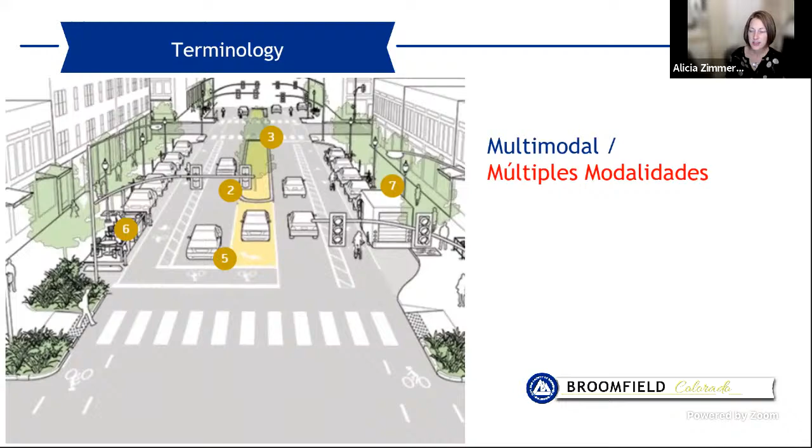Multimodal just means multiple modes of travel or transportation. And a mode of transportation is what method you use to move yourself. Usually we think of the ones traveling in a vehicle, traveling by transit, bus, something like that. Walking, wheeling on the sidewalk, wheelchairs, and some other wheeled vehicles or people using wheels. And then those on bicycle, and that could be different locations depending on particular use, comfort level, and facilities available. So that's what multimodal means in the perspective that we're looking at tonight.

When we look behind, what we say behind the back of curb, so between the curb and the buildings or the park or whatever, sidewalk, most people are familiar with that term, but the sidewalk that I've shown in yellow here is what we would call a detached sidewalk, which means it's separated from that curb. And an attached sidewalk would be in this orange area shown right here. Again, attached to the curb. Those have different comfort levels and we have different conditions throughout the corridor. So we'll talk through those as we go through this as well.

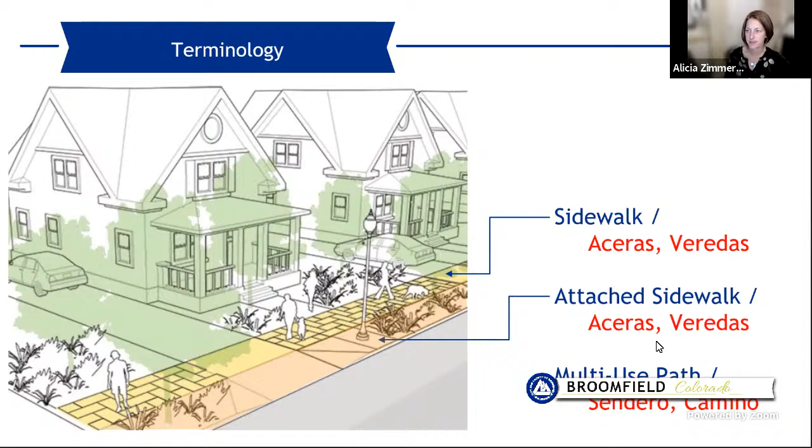And I've also shown the word multi-use path here. And the reason that's not called out specifically is because multi-use paths look a lot different depending on where they are. Generally, they are wider than a typical sidewalk because they're designed with the intent to accommodate bicycles, people on bicycles, people walking, people in wheelchairs, people with strollers. And so they're usually wider and quite often detached from the curb. So we'll see some examples of those. And you all have examples of those on the corridor already.

So what we call a bike facility is any treatment on or off the road that accommodates a bicycle. And bicycle facilities range from including a dedicated space on the road for somebody riding a bicycle, or a shared use path for somebody riding a bicycle, all the way to a sharrow within the travel lane. And that's still technically considered a bicycle facility. We'll talk through those later as well.

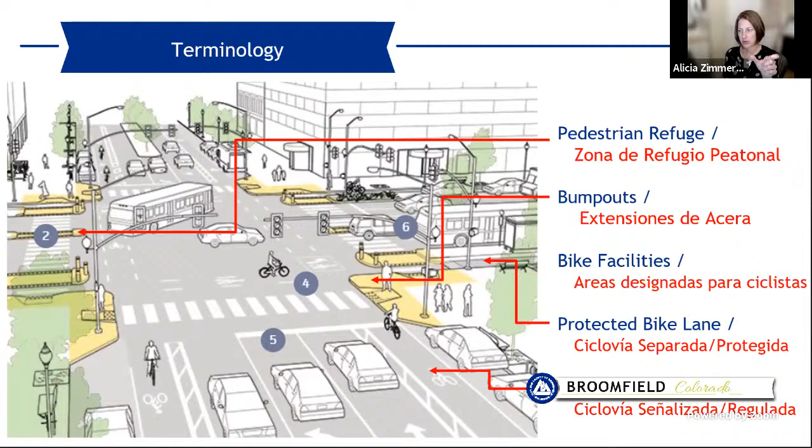So two types of bicycle facility that some folks are less familiar with: protected bike lanes. In this graphic, this protected bike lane is separated by a curb and median, separated from vehicular traffic by a vertical element, curb, post, something. The difference with a buffered bike lane is it is horizontally separated, not vertically. And so with a horizontal separation, we consider it a buffered bike lane.

So with that, I'm going to turn it over to Marc to talk about the project background. All right, thank you, Alicia. My name is Marc Ambrosi. I'm a senior transportation planner with the City and County of Broomfield. And I am project manager on the Broomfield side for this project that we're talking about tonight. Next slide, please.

The first one is multimodal transportation. So this plan tells staff that we are planning for all modes of transportation. This includes pedestrians, bicyclists, automobiles, buses, not just people in their personal automobile. The second thing that I want to point out is that we are planning for people of all ages and abilities. So this plan established policies to ensure that we are providing a safe, functional transportation system for all users, whether that's children, older adults, people with disabilities, and everybody else in the community.

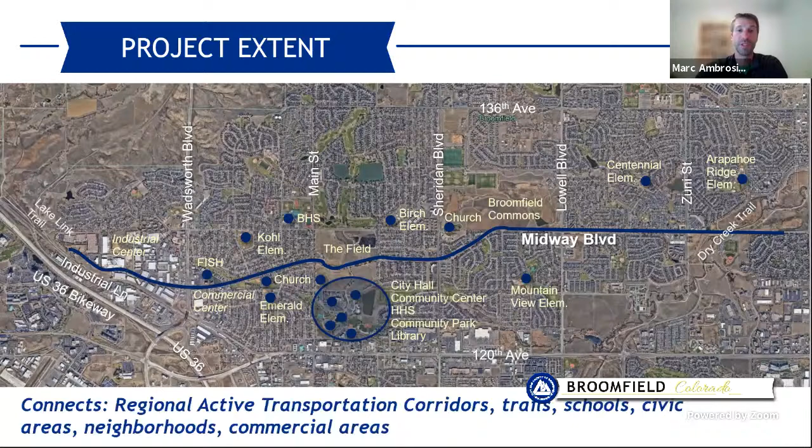So in this project, we are looking at all of Midway Boulevard, and this extends from the Lake Link Trail on the west, where there's a little cul-de-sac, all the way out east, actually into Westminster by the Dry Creek Trail. And in this graphic, I just want to point out that there are a number of facilities that are either on or close to the corridor. This includes things like schools, municipal buildings like City Hall, DMV, the library, open space throughout the corridor, places of worship, and community facilities like Fish and Health and Human Services. Next slide, please.

So why are we meeting tonight? We're here because we need your input. We need the public's input to make sure that this corridor is safer and more equitable for everybody using it. And your voice is really essential for the development of this corridor. We want to make sure that whatever comes out of this study, the recommendations, work for the people who live here. Next slide, please.

Through the spring and just wrapping up now, we've been doing data collection and analysis. We also kicked off the public engagement on the Broomfield Voice page, where people have opportunities to comment on a map. We've also been out at a few events in the community where we had other opportunities for public engagement.

The next phase, shortly after we hold this round of public meetings, we'll be moving into alternative development and concept design. And so what we're going to do here is work with the consultant team to identify probably 2 or 3 different potential strategies for different locations on the corridor. These would be improvements. They may be things like operational changes. So, changing the striping a little bit, changing the signal timing. And we're going to put together a package with a couple of different alternatives.

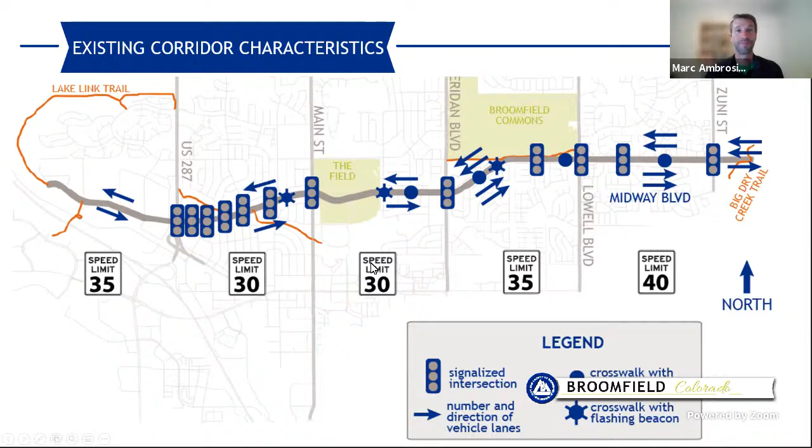There's a pretty wide range of traffic volumes that we'll see. Starting on the very western side, west of US 287, we have the lowest traffic volumes. That kind of makes sense. Over there, the land uses are more industrial. There's not the residential, and the road kind of terminates at the end.

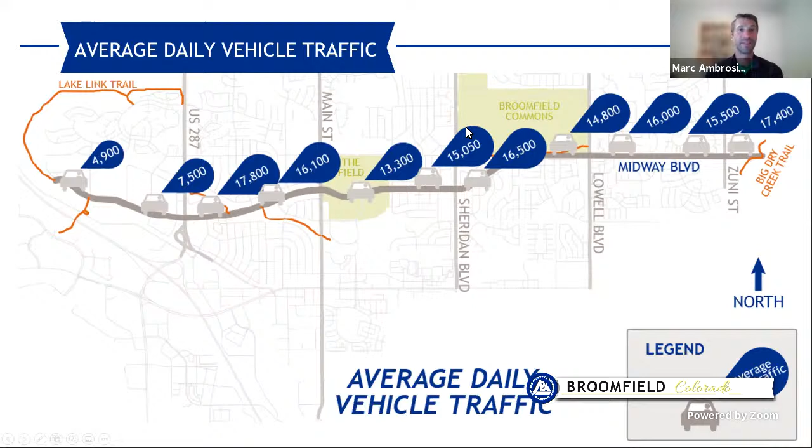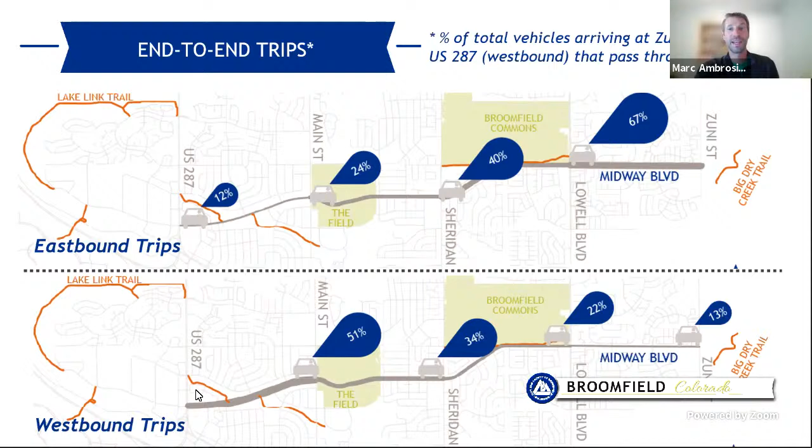Now we see something very similar on the westbound trips on the bottom half here, where again, about 90% of vehicles aren't continuing all the way to US 287. So what does that mean? And we're going to jump to the next slide here.

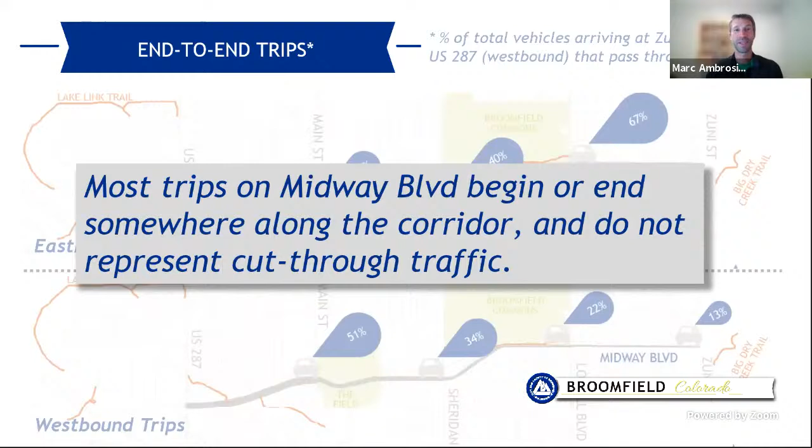So this is important. Most of these trips on Midway are not cut-through traffic. It is not regional traffic coming from Thornton or somewhere else using Midway as a cut-through so they don't have to take 120th or 136th. This is people who live on or near the corridor, using the corridor to get somewhere on or near the corridor. So when we're talking about traffic volumes and speeding, that's really the people who live in this area. So that's just something to keep in mind. Next slide, please.

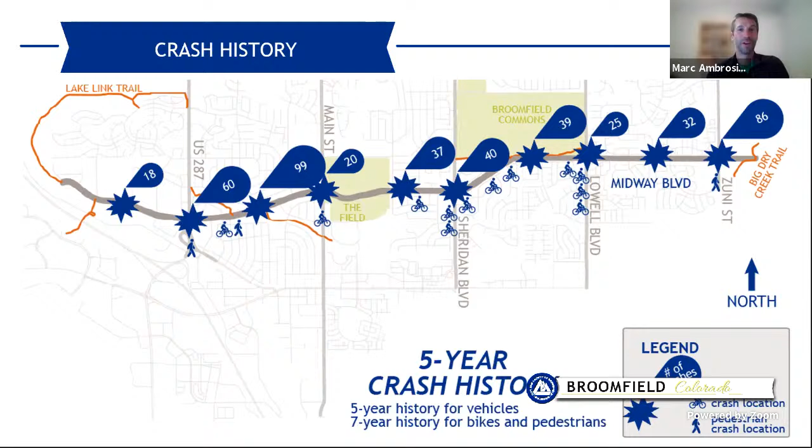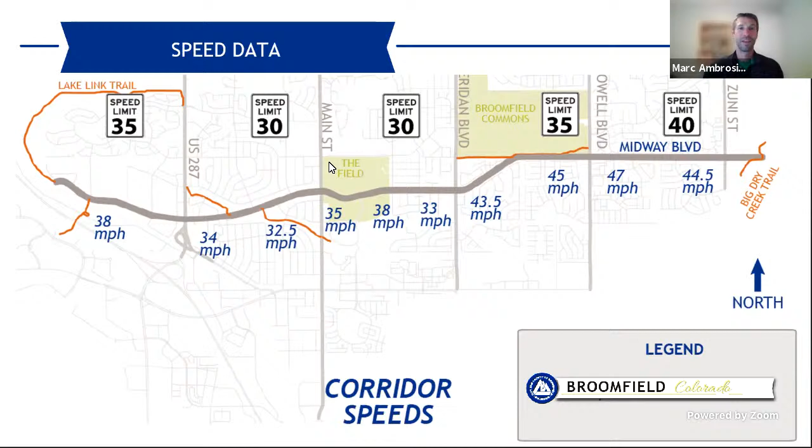All right, next slide, please. Oh, all right. Well, I'll be turning it back over to Alicia to take us away on the rest of our existing conditions information.

Thanks, Marc. So I think there's the question of, okay, now we have this existing conditions information, and that, I should note, is not all we have. It's just kind of an overview of some of the ones we thought people may be interested in. So we have this data, and what does it mean for concept and alternative development on Midway? And I'm going to focus on maybe one example of what we do with that type of data.

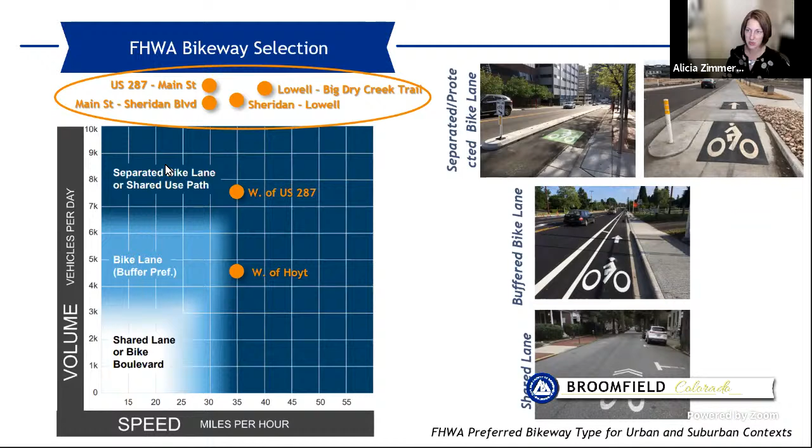And I've given some examples over here on the right of what these types of bike lanes are. We'll talk more about the benefits, but just to keep a picture in your mind, this shared lane here is this white box, and it's a sharrow or a shared lane marking. You actually have one of these on Midway in this section. Let's see, right here. That's where you currently have a sharrow. And then buffered bike lane, we talked about what it is with that horizontal space, and then 2 examples of separated or protected bike lanes, which would be the navy blue. So that's one of the types of things that we do with that data.

4% of people are highly confident bicyclists. 12% of people are somewhat confident, and 59% are what we call interested but concerned. That means they want to bicycle, but they might be concerned about some reasons for not bicycling. And then there are 25% of the population that we say, no way, no how. They're not interested in being on a bicycle. And so we've shown them as pedestrians because everybody is a pedestrian at some point in their trip.

2 things are important about this information: 16% of people is all the people that are regularly comfortable biking today. But if we look at people who want to bicycle, who are interested but concerned, 60% of our population would ride a bicycle if it were safer and more convenient. So that's one of the reasons you'll hear me focus on the interested but concerned population when we're talking about bicycle facilities. We want to make sure that Broomfield is providing mode choice. And right now, in some of the transportation modes, there isn't much of a choice for particular sections of these roadways.

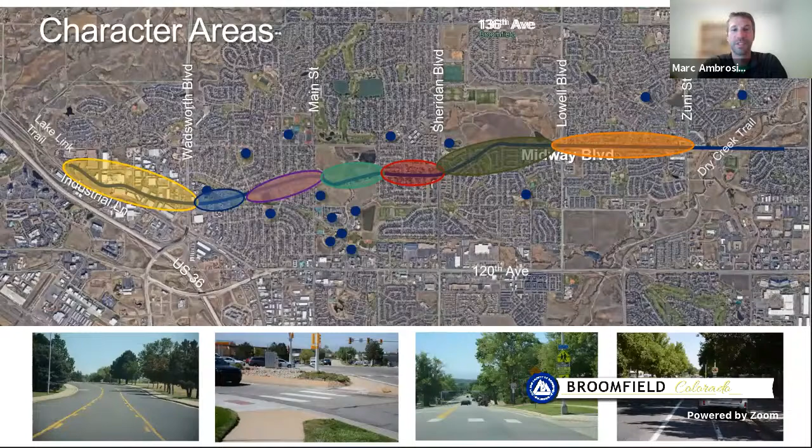And so we just had a nice discussion about that very western section, west of US 287. It's very industrial. You see some trucks. And so we've categorized that as its own thing. We do similar things throughout the corridor, and the images below kind of give an idea of those different character areas throughout the corridor. We're not capturing everything, obviously, but these are just an example of some of the differences you'll feel when you're on Midway Boulevard.

Next slide, please. So I'm going to jump right into talking about that section between Lake Link Trailhead and US 287. We have this great image here showing one of those large tractor trailers. You'll notice there's no bike lanes. There are narrow attached sidewalks in this section. There's a whole lot of pavement between the two curbs. And so this is an area that we think at minimum we can do some restriping and reshape this section of the corridor to make it a little more accommodating for bicyclists and pedestrians.

One of the things about this section of the corridor is the land uses adjacent to it are a little bit more industrial. And so this is not, today, particularly the area you're going to want to go out after dinner on a walk, but we hope to turn it into something that feels a little bit more comfortable for everybody out there. Next slide, please.

So US 287 to Main Street, the way we have broken this up is actually into two sections. This section of roadway overall has the highest traffic volume of the entire corridor and has significant crashes. This area is categorized by kind of a mix of travel lanes. So primarily you have one through lane, but you have all kinds of turn lanes going off in different directions, and there's limited space between the curbs, and there's ultimately limited right of way in this area.

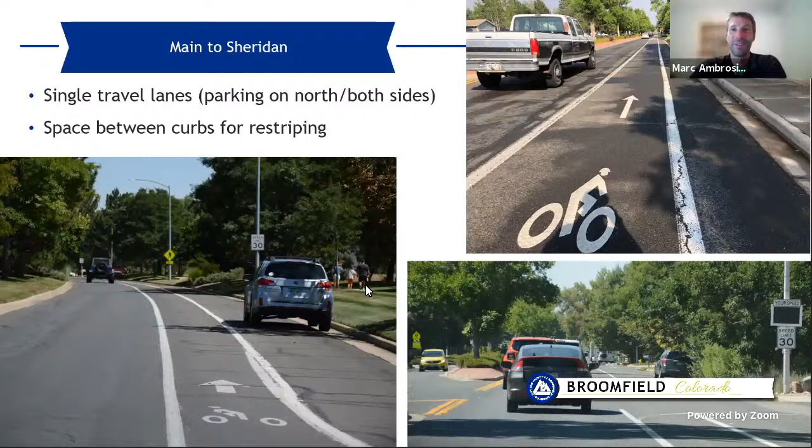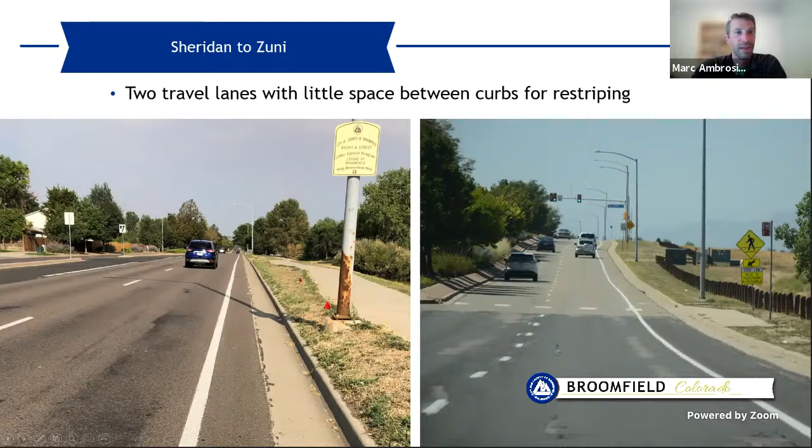The on-street space, there is a lot of pavement, but with the 2 lanes, there's not a whole lot of space to stripe in a bicycle lane. And in addition to that, this is the area with the highest vehicular speeds. There's 2 lanes of traffic that would be next to you. It's probably the least comfortable area for biking on street, other than, you know, between US 287 and Main Street. I think that kind of categorizes this section, and I will turn it back over to Alicia to lead us through some of the ideas that we're going to be looking at with this project as we move into developing alternatives.

Great. Thank you, Marc, for going through those sections. And I was watching the Q&A, and I'm gonna make a comment on John's question. That's a very astute question because it applies to what we're talking about here. And his question, I think, relates to, yes, all the sections are very different, but how can we make sure that the experience for pedestrians, or the experience for people on bikes, or even the experience traveling in a car is consistent and understandable? And that's one of the goals we've identified for this project from the very start. While we recognize that it might not look the same in every section, we will make every effort to keep as much consistency as possible.

And the other thing you start to think about if you aren't able to keep consistency is to make sure that it's very clear when the changes happen, you know, the wayfinding and the markings and the visibility is clear enough that makes it comfortable to make those transitions. So yes, good question. We're working on it. Yeah, I also think that consistency leads to predictability for both bicyclists and pedestrians and vehicles, and that leads to more safety. If people know what to expect out there, there are fewer chances for conflicts because people are anticipating what's going to happen.

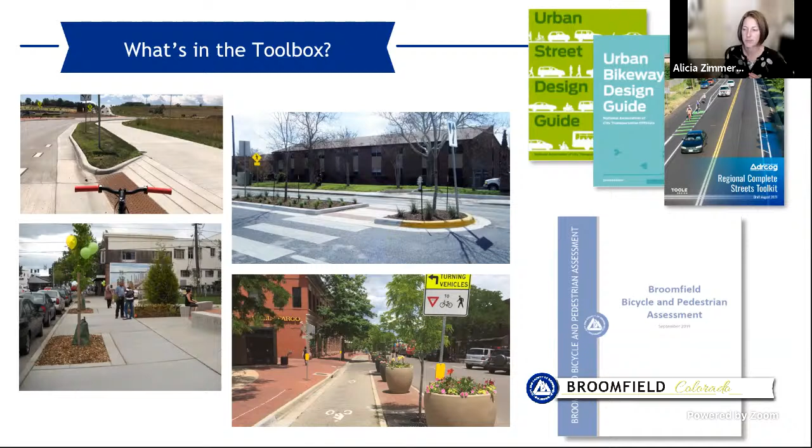And then also in the bottom here, the bicycle and pedestrian assessment that Marc talked about earlier had a toolbox of its own. So this isn't new stuff. Some of it's maybe a little bit outside of what you all have considered before, but it's also being discussed with the Broomfield staff to make sure they're comfortable with it and comfortable with having to maintain it as we move forward. So let's get into it here.

Going to talk about intersections first. You all have seen this graphic before, so we'll talk about some components. Bump out, we're going to start pretty straightforward here. You have bump outs in different parts of Broomfield. A bump out, or curb extension, basically extends the curb. It reduces the crossing distance for this guy walking across here. He doesn't have to be out in the roadway and exposed as long as he would be if he had to make it all the way here.

It increases visibility for the pedestrian to see a car, and for somebody driving a car to see a pedestrian. Basically, when you're not trying to peek out behind parked cars or vegetation, it's much more likely that 2 users will see each other before a conflict occurs. The other thing bump outs do is reduce speeds in some instances. For through vehicles coming through on this main street, they add what we call side friction along this face of the curb.

If it was just open street, it's much more comfortable for a vehicle to go faster. Whereas when the lane feels narrower and a more appropriate width, you're more likely to go an appropriate speed. It also reduces turning speed. This is a pretty tight radius, but even if it's a little less tight, a person driving a car turning right here has to slow down much more to turn. And the great thing is, if I'm driving, I am much more likely to see a pedestrian coming across if I'm turning slowly and more completely before I get to that crossing.

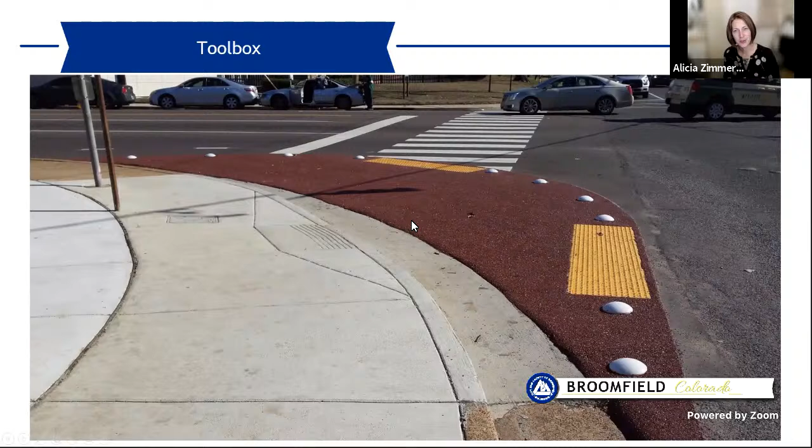This picture is another kind of bump out, a little different one. It's just to point out that we can do these in different materials, including more temporary materials. In this case, it may provide a little bit more visibility, but also allow for an occasional large truck through here. So this is a little different than you usually see, but just to start stretching your mind about what we might be considering here.

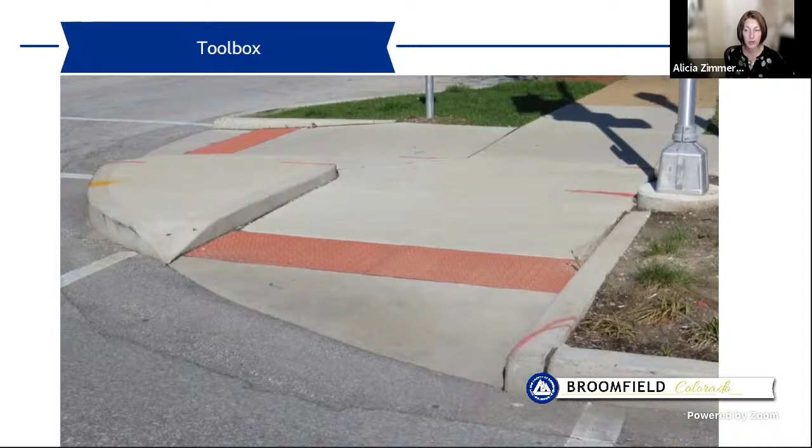This is a more traditional, typical bump out. Improve the curb ramps, make everything ADA compliant, much more comfortable for people in wheelchairs. And then have a little bit tighter radius here and a little bit better visibility.

I would get far enough around my turn that I would be much more perpendicular to a pedestrian or a person on a bicycle who's crossing there. So setting back the crossings, whether it be a pedestrian, protected bike lane, or multi-use path, can help with visibility and reducing crashes as well.

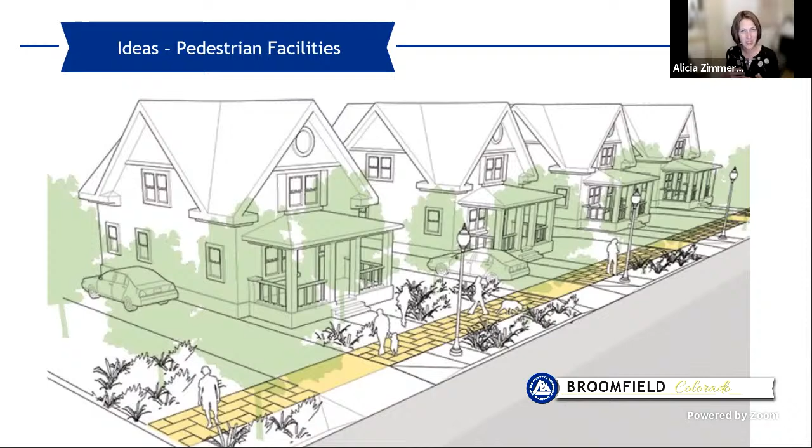Which is believable. And then some folks have been sharing that they're just not comfortable on the sidewalks, the configuration or the visibility. And so some examples of ideas there, certainly considering widening the sidewalk where possible. I want to point out, though, we know that there's a significant amount of beautiful mature vegetation and a number of locations with tight right-of-ways. And so we're certainly not looking to blow out that vegetation or anything like that. Of course, you may end up with some adjustments, but we know that it's going to be more constrained because of the established nature of these neighborhoods.

So one idea, you can widen the sidewalk or construct a multi-use path. If you can't do that, there are some kind of soft surface ways to provide some extra space without making as big of an impact on some of the vegetation. So these are two examples of that type of treatment.

And a little bit bigger footprint, we were having a transportation nerd discussion about what this technically qualifies as. Some people would call it a shared use path because it's a path that includes many different uses. But some people would call it a separated two-way bike lane and a sidewalk. It doesn't really matter what it's called. What matters is that it's acting as a wider facility with a way of separating out users, in this case, in a location that has a high volume of users.

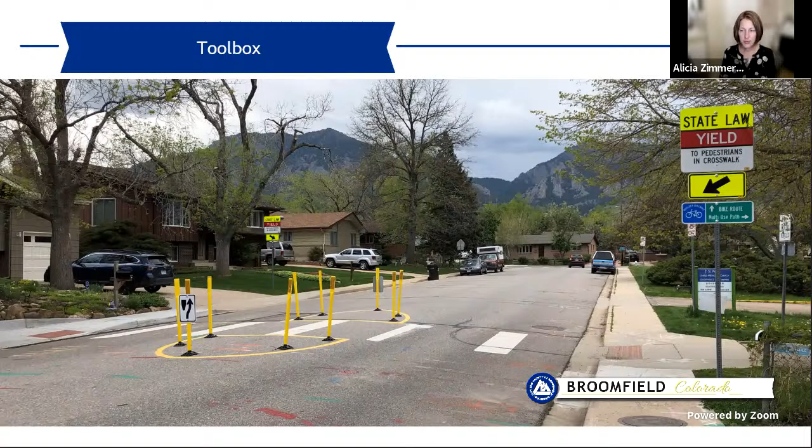All right, I threw this picture in here just to show that there are temporary measures, even for something like a pedestrian refuge island, that we may be looking at. You've seen bump outs in different locations with these flex posts as well. And so you can look at, as Mark mentioned, that low hanging fruit, and Sarah mentioned kind of phasing some of these improvements. You can look at using different materials the first time around. The other thing it does is it lets you check the configuration and make sure it's working out for that location. So we'll keep these in mind as well.

I put this graphic up here just because sometimes we get stuck down this rabbit hole of thinking, how can we physically change what's on the ground in order to quote unquote fix or improve something? And sometimes, especially at intersections, it's more of an operational improvement that can make a big difference. And operational improvements don't usually take space, although they can impact vehicular traffic enough that it requires more space. However, this is an example of one that we may consider at some of the signalized intersections. And it's called a leading pedestrian interval, or an LPI.

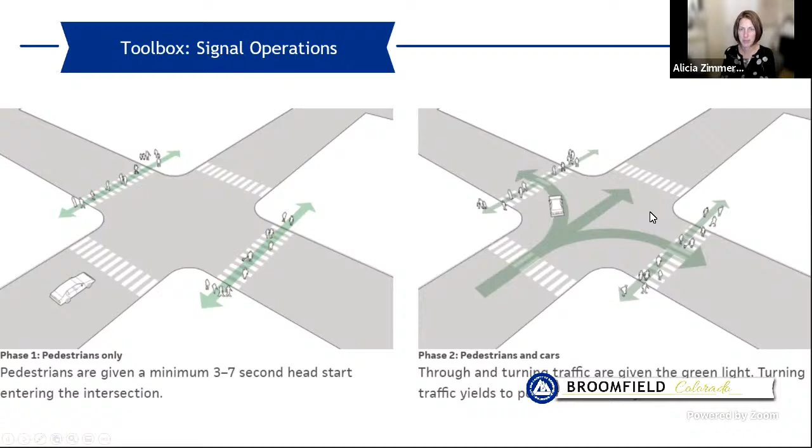And if you look at the left graphic first, the white walking person signal for pedestrians goes while all of the traffic signals are red, and lets those pedestrians start walking across first. And a few seconds after they get out into the roadway and establish themselves in that crosswalk, then it gives a potentially conflicting turning vehicle the green light. You would never give a green arrow, but this is just if you're turning right on a green circular indication. The pedestrian would already be out in the crosswalk. So you'd go, oh, I can't go yet because that pedestrian is there. That's an LPI, and is one example of an operational change that can help multimodal users.

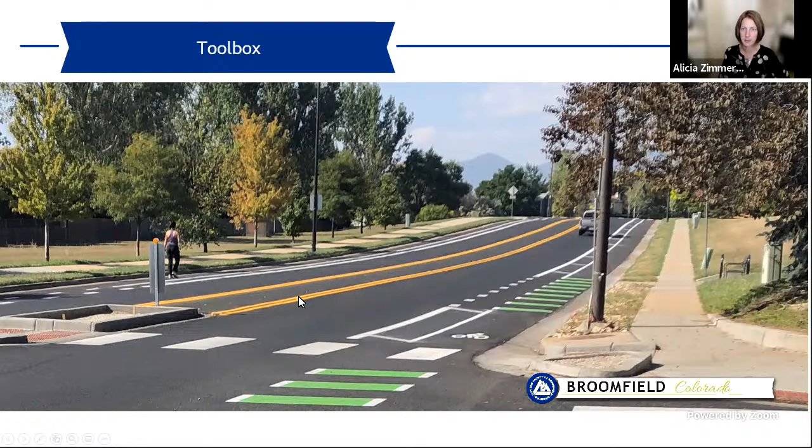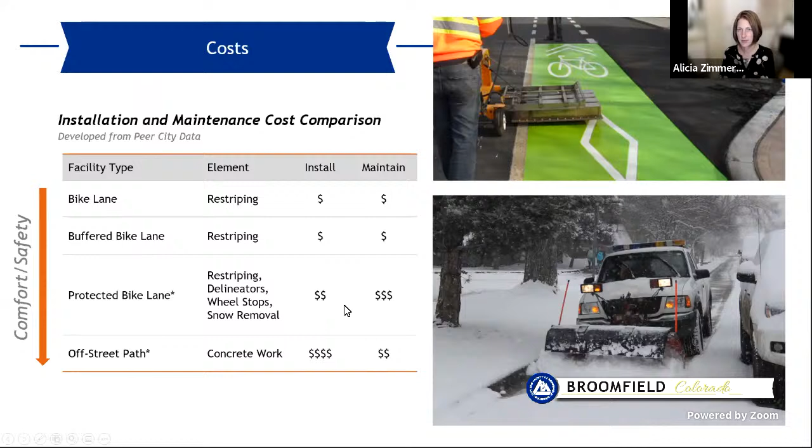I have this cost slide up here, and this is not to think that this is how we're making our decisions, but this is real money that's required to install and maintain these facilities. And it's your taxes, really. And that's why we're flagging it here. This, as I mentioned, is not the only thing that we're going to think about, but we want to make sure, out of respect for the people who are going to have to maintain these and pay for installation, that we at least keep it in mind. And again, providing additional comfort and safety can also increase the cost. So something we'll keep in mind.

Okay. That's the whole world of possibilities of what we might apply to Broomfield when we're looking through alternatives. I'd like to ask you some questions about the possibilities we just presented. The questions I'll pop up in a poll here are basically just about whether you think we're looking at the right types of things specifically. So I'm going to launch this poll. There are 3 questions here. And they also request that you share in the chat which ones you think will work, which ones won't work, what we missed. So we'll leave this one up for a little bit so you can put additional info in the chat. Here we go.